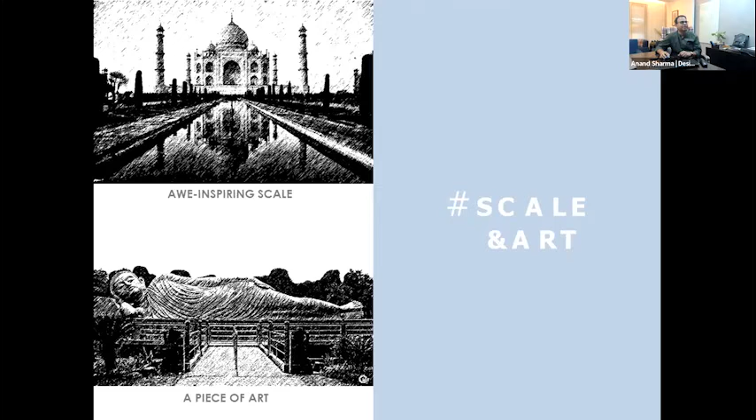The joy of flying is something that we've all experienced at various stages of our life. Right from when we used paper to fold and make it into an aircraft and let it soar through the skies. So origami became an element of expression, a tool of expression in this design. We have consciously created scale. We have tried to integrate art with our design, much like I was earlier talking about the T3 welcome wall. So some of the elements that I will talk about today are actually being used as part of the terminal design. The Icarus, the first mythical human endeavor of flight.

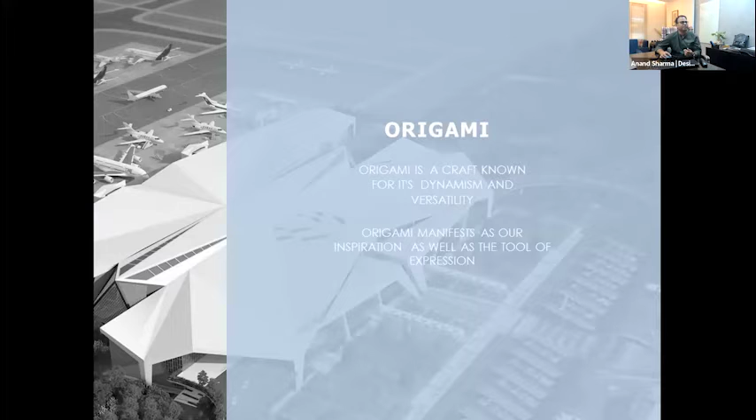And Icarus is literally the epitome of the human urge to fly. Icarus is what doubles up in our case as the city side canopy at the terminal. It's a 90-meter long on one side, 180-meter wide overall canopy, which is styled after the famed Icarus, but doubles up as a drop-off canopy. Origami is very manifest in all our design expressions at the airport. We've used that to create the shape of the roof. We've used that in signage, we've used that in flooring.

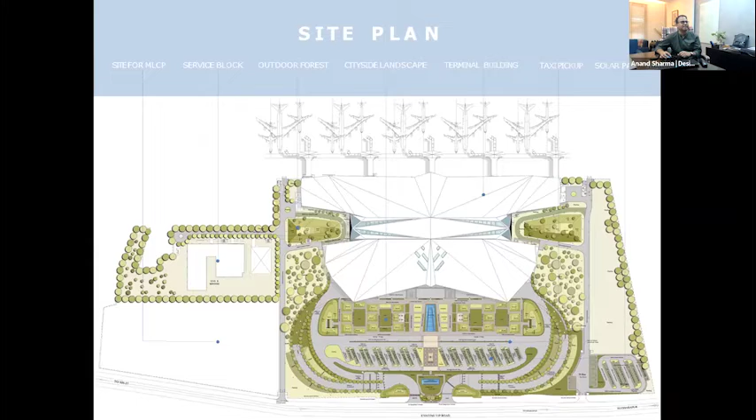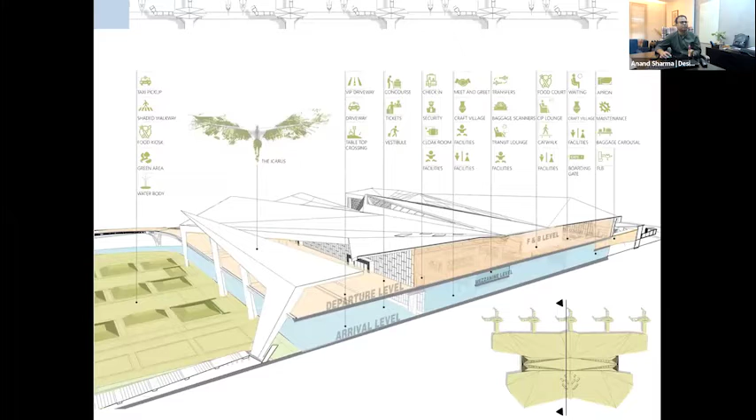Guwahati is a 50-acre city-side development, beautiful versatile landscape, and that is the form, exploded isometric. The roof on top deals very specifically with the art of origami. Without getting into too much detail, that is a sectional perspective. Origami roof, this is how we started, right? Most airport envelopes are rectangular structures. We started with a rectangle ourselves. We thought of creating two pyramids, which become what is now being called the indoor forest. And then we basically had fun, folding paper along seams, letting loose on the valleys, romancing the ridges. This is the interesting form that you finally come up with.

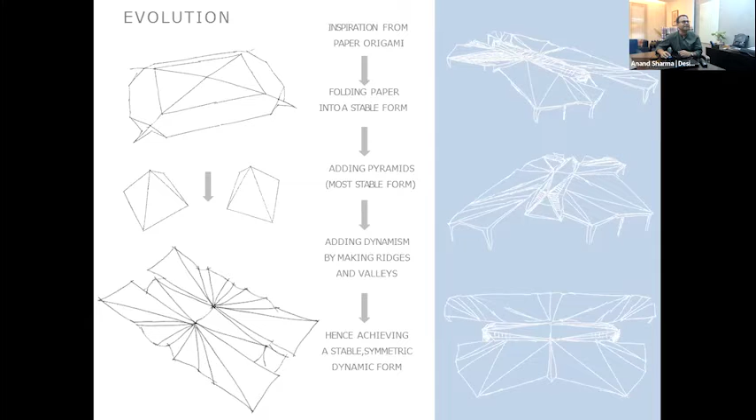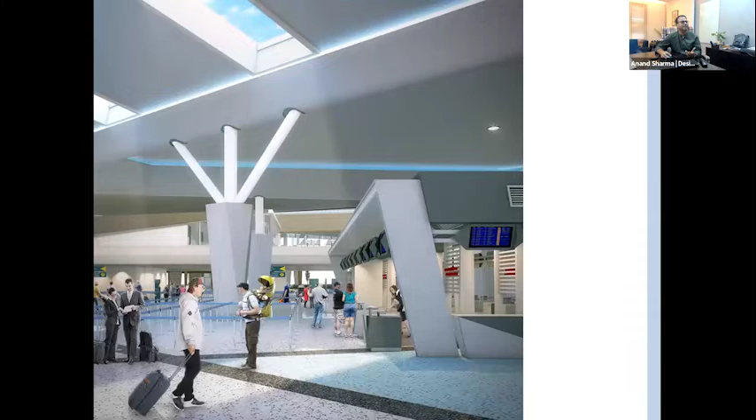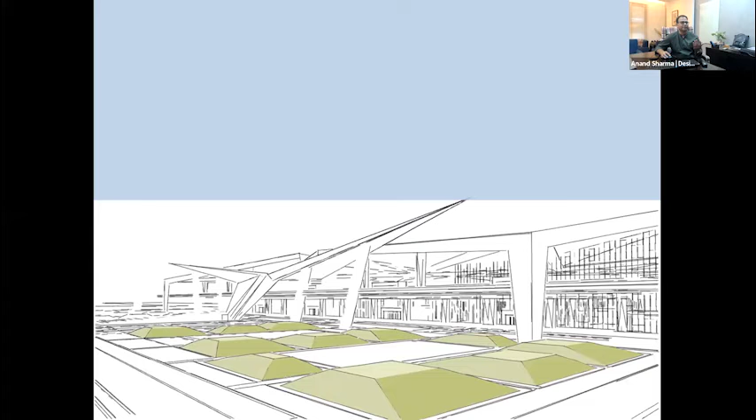It's an extremely complicated roof design, made possible with extremely diligent working from our colleagues at AECOM who've done the structural engineering for this. And that's what the roof looks like from within. Very diverse and very interesting. Now, this is Assam, right? Guwahati, known for the tea gardens. That is what the entire context is all about. So the city side landscape is, very simply put, inspired from tea gardens. The city side that the passenger meanders through are truncated plateaus, like the terraces that you see in a tea garden. That's the city side view.

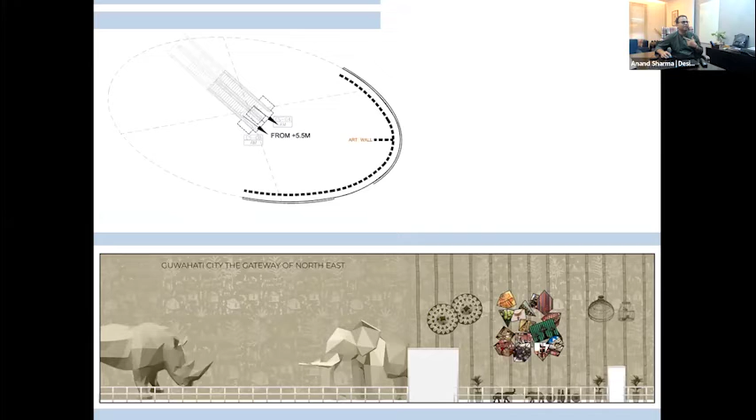We have what we are choosing to call the Namaskar atrium. So the passenger who's coming out of the aero bridge and getting into the baggage reclaim area comes into an oval atrium which is being called the Namaskar atrium. And the wall is a dynamic display of the local art and motifs and cultural forms. That is what the Namaskar atrium looks like.

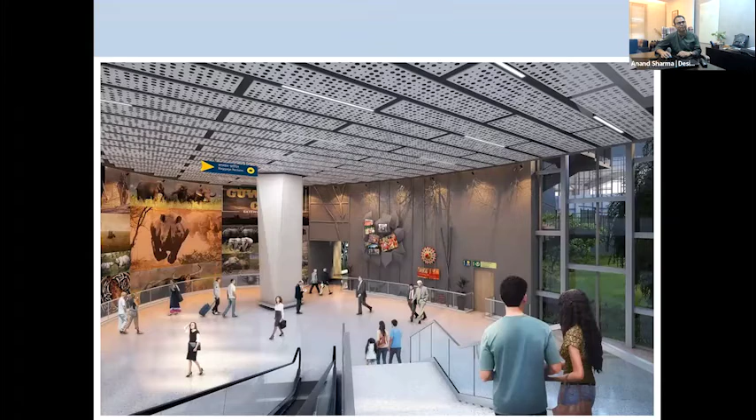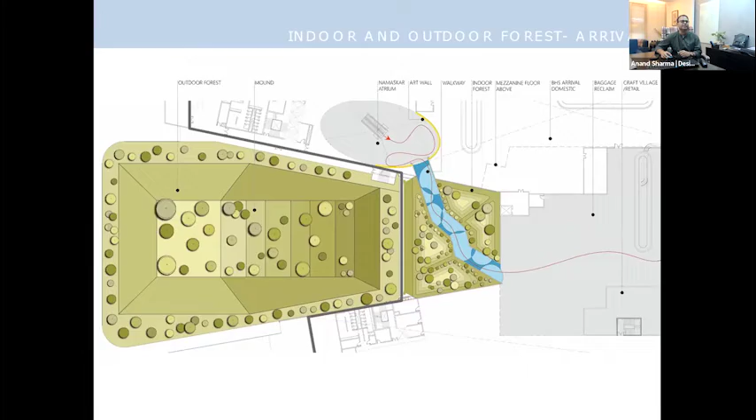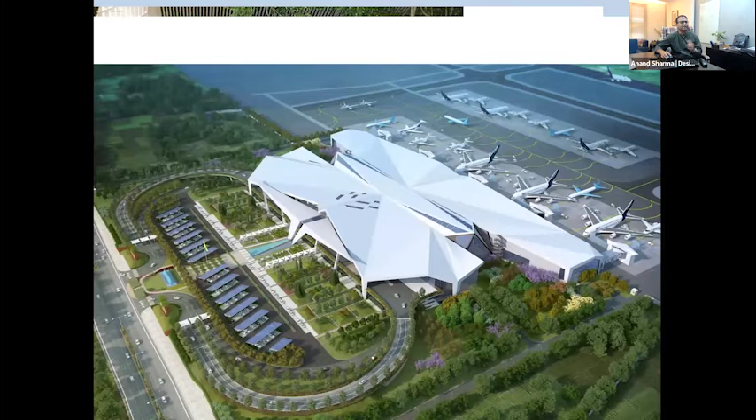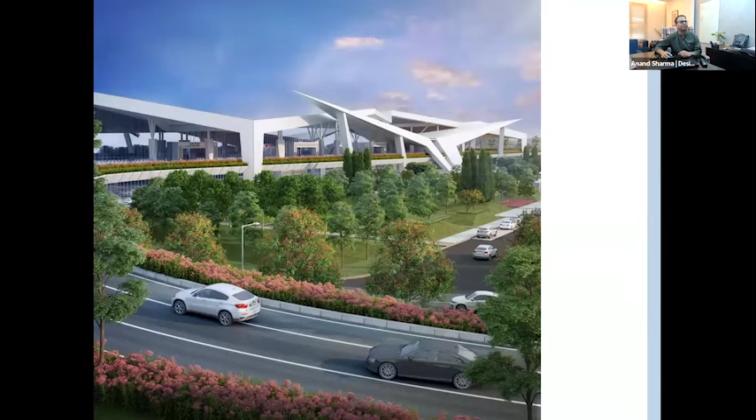We have the indoor forest. The indoor forest is an integral portion of the customer traversing through the airport, the arriving passenger. I spoke earlier about the experience of the user who's coming into the airport, and the passenger literally meanders through the indoor forest. It's not a straight line of path, but one moves in as one goes on the way to baggage collection. Those are internal views of the indoor forest. Some more views. It's a 30-meter high glass pyramid with zinc cladding and diagrid glazing and whatnot. These are aerial views of the Guwahati Airport. As you can see, it's an extremely complicated roof. That's looking at it from the drop-off corridor, the arrival corridor, the check-in hall.

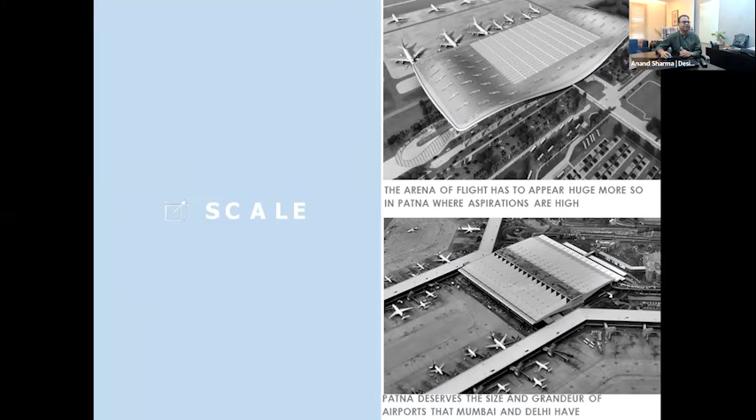The other case study that I want to talk about is our upcoming airport project at Patna. This is going to be the second airport of Patna at Bihta, a civil enclave at the Air Force Station. And our thought was to bring in connect, to bring in clarity, to bring in scale. Clarity because airports are very confusing places to be. A line of sight because if you can see where you are going, you will definitely get the course. Scale because the arena of flight has to appear larger than life, and more so in Patna where aspirations are very high. Patna deserves the size and grandeur of airport that Mumbai and Delhi have. Scale is important.

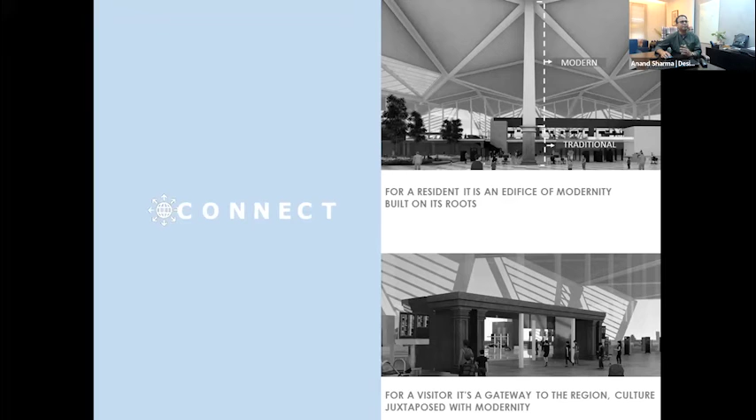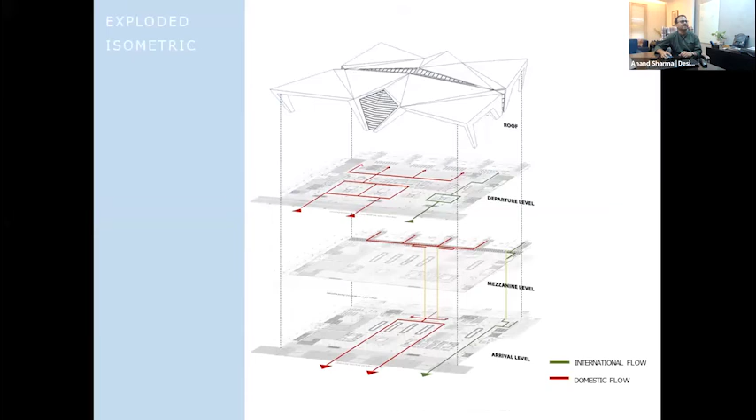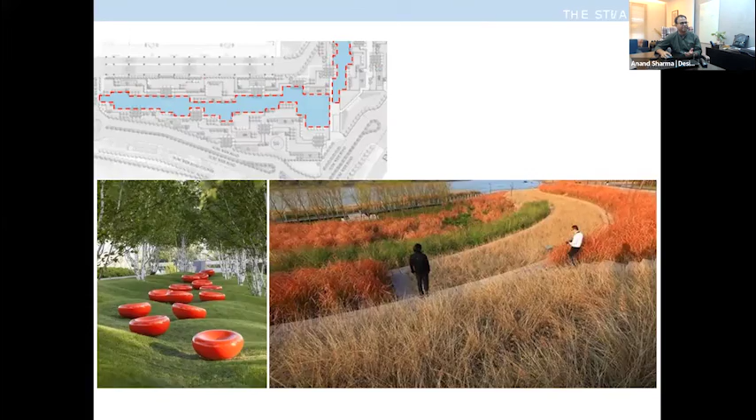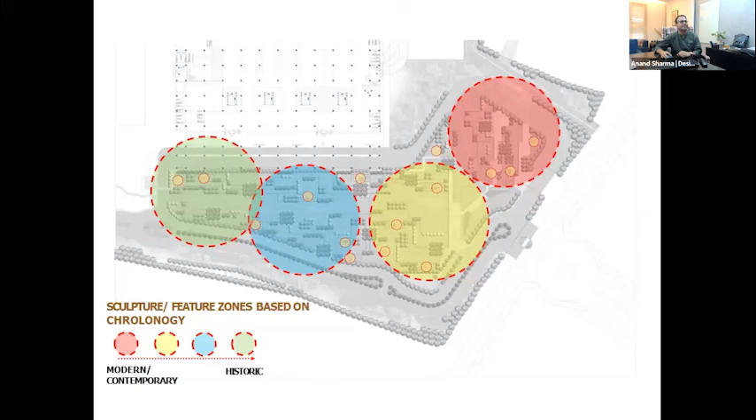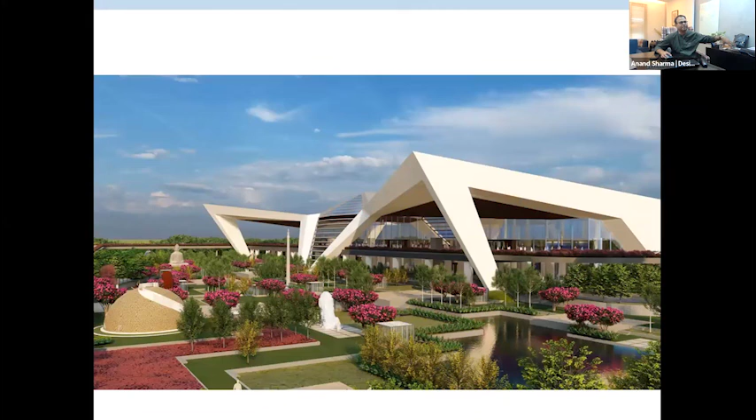So I'll just rush through. It is inspired by the ghats of Patna, like the river of time, the Ganges, which is the mother river of Patna. The city side landscape has a water body named and inspired after the Ganges. And the city side landscape is on ghats interwoven into the form of the river. Those are some shots of external landscape. There are various time zones to Pataliputra. We have tried to bring in sculptures from various time zones, placed across the timeline of the river of time flowing through. Some art installations inside, outside.